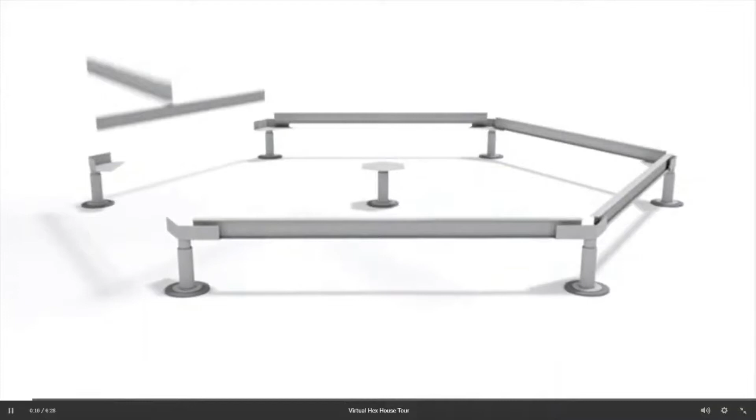One key area we've focused on, based on feedback we received, is that when there's topography - when the ground isn't even - it's difficult to lay out the shape. I understand that, but it's a perfect geometry, so it seems like it shouldn't be that difficult.

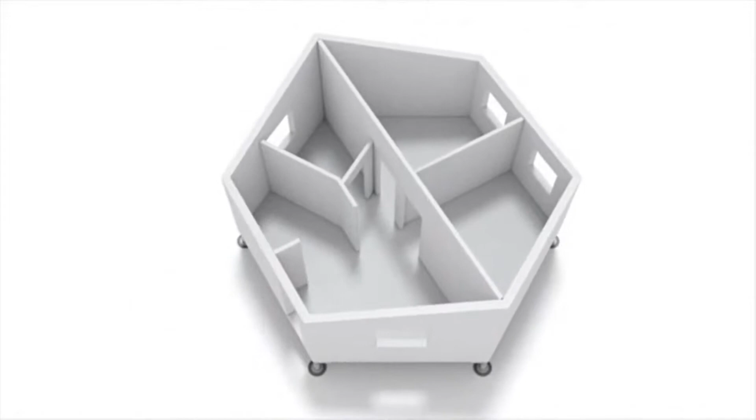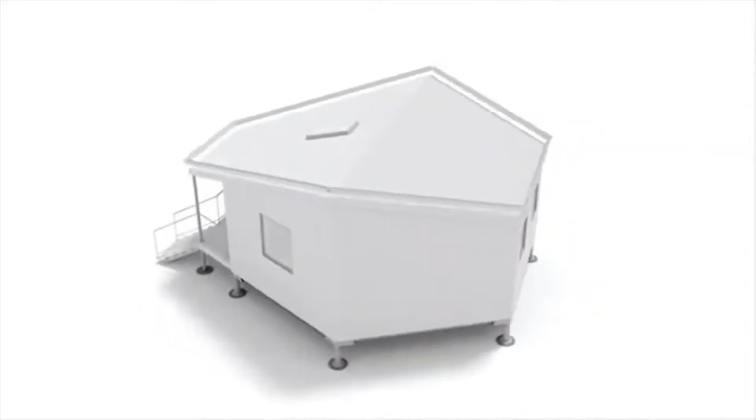We're trying to make it easier for the final user to lay out. But the foundation system can really be whatever you want - a slab on grade, helical piers, or in flood areas, piles with piers to elevate the structure. So it's very flexible in terms of how you site this.

I've been looking at hand-installed piers to see if a person could do it themselves, by hand-screwing piers in, and whether that could actually handle the weight of the building. That's a big hurdle for us to try and perfect.

But once the foundation system is in, this is a system where you're fully enveloped in a matter of days. It shows all the walls as single pieces, but those can be broken down into panels handled by a couple of people and placed where they need to go by hand. You just start assembling it like a kit, like building a much smaller model - you place the walls together, and once they're in place, you start setting the roof panels in.

Once everything is connected, the envelope is essentially done and you're weather tight. For the most part, depending on your SIPs, you might have to put on a roof system or siding for the final waterproofing layer. But it allows you to start moving trades in and out of the home, and in a disaster relief situation, you're sheltered quickly. You might not have all the amenities yet, but you can work inside the building to finish it while staying dry and warm. So that's an advantage of the design, being able to use the building as a home pretty quickly.

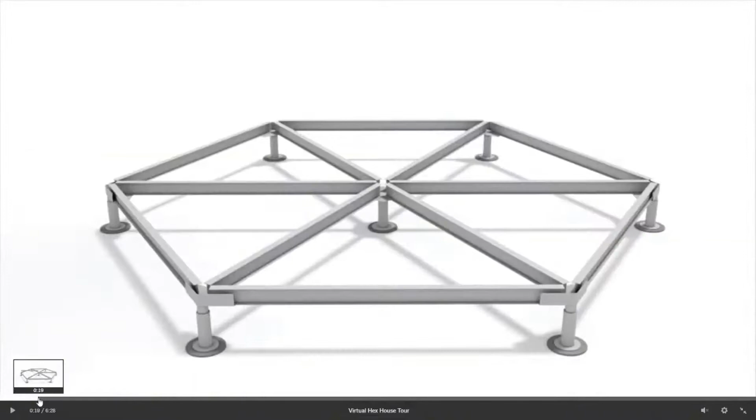That X that comes across isn't really needed. What we found is that the SIPs can span from the center beam to the perimeter, so those cross beams are not normally necessary. The prototype we built in Minneapolis doesn't include those, but has a perimeter and that center beam, which are all glulam type beams.

The one in Germany actually uses more of a traditional framing method, using joists to frame from the perimeter beams to the center beam, and then the walls sit on top of that floor. I believe the one in Amsterdam, Amro, you have to remind me.

I think it used light gauge metal, right? Was it in this configuration, or did they only have the perimeter and center beam as well? No, they had a slightly different configuration. We're developing an aluminum frame right now that we think might work to our advantage, but I've gotten different feedback from contractors saying you might have to bring in a different crew to do it, so it might not be as cost effective as we hoped.

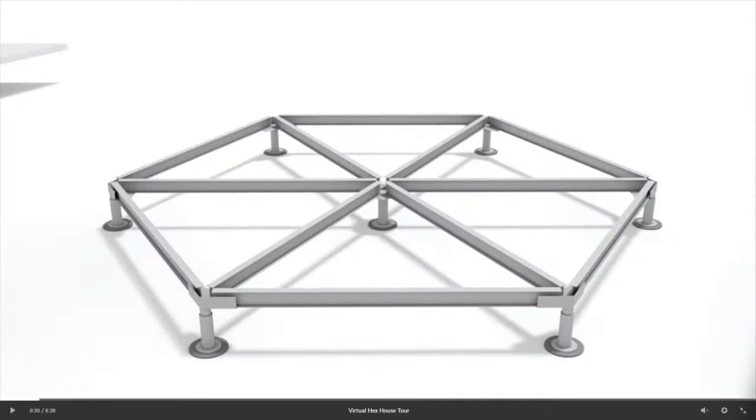But the foundation system is pretty simple. The floor can span about 12 feet. The Hex House is a hexagon inscribed in a 14-foot radius circle, so all the spans are 12 feet or less for the most part. One last point is that while the floors are designed as SIPs, it's not necessary for the floor to be a structural insulated panel if you're doing it off a slab, or if you want more traditional framing, that's completely acceptable.

So it's a 14-foot radius, and what's the total square footage then? Without doing my quick SAT math, what is the square footage? Exactly 510 square feet. Oh wow, so it's a pretty good size, much bigger than a tiny home. It's a pretty good sized footprint.

Yeah, the idea was that we sought out to design a dignified home, not something meant to be oppressive to the human, because we recognize that people live in these for a very long period of time. So we wanted to give them a decent size home. It's not even a tiny home; it's a small home.

One of the things about the hexagon is it's one of the shapes that closes in on itself, found in nature, and when put next to each other you never have any gaps. So it's a very convenient, structurally rigid shape. Also, when you have that extra break in the exterior skin of the building, you become much more rigid structurally. The floor looks like two hexagon shapes cut in half. Is that a standard size a SIPs manufacturer could make, or is the way the floor comes together challenging, or are these usually triangles that come together, or is that a standard shape?

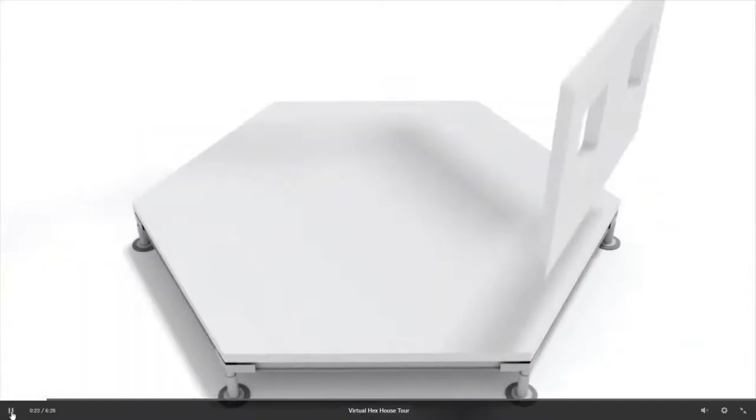It just made it more accessible, because you get the floor on, and then you start putting the walls on, and you get to the roof. So really all these pieces would be a series of structural insulated panels connected together.

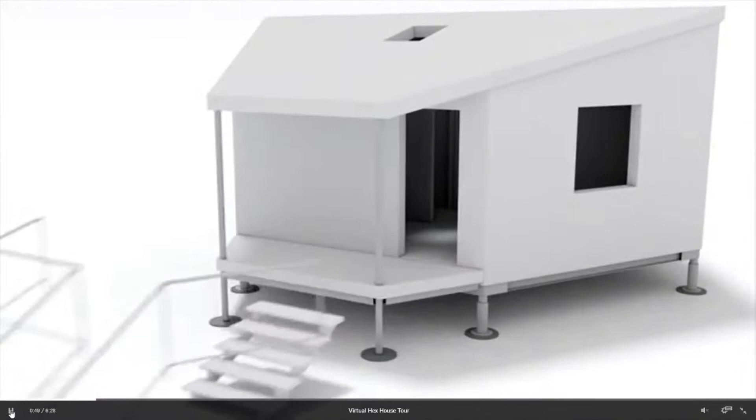And the interior walls are also SIPs, same material. They can be, or they don't necessarily have to be. But we recommend that you can do a little bit thinner SIP, because you're just trying to get the structural elements, not necessarily the insulation. It's more for sound attenuation.

But we do recommend that the plumbing wall, you just either do it with a SIP and then a framed wall in front of it, or just do it in a framed wall so you can hide the plumbing, and it makes it a much more reasonable installation for the tradesman.

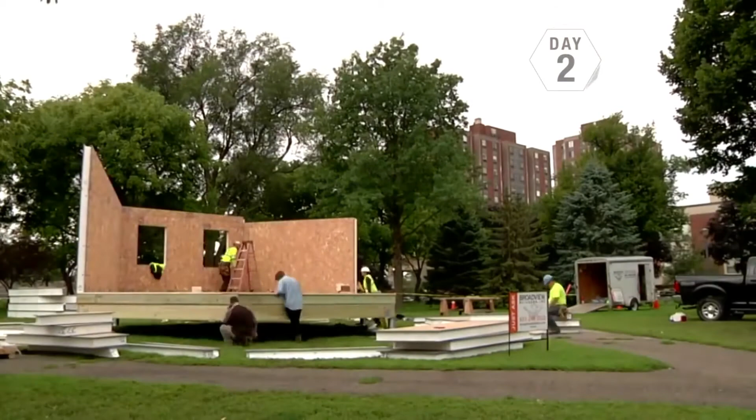The beauty of this is that at the lowest end we have a typical 8-foot, but because it's a SIP and it's spanning across, we end up at the ridge at about 12 feet. So we end up with a pretty nice vaulted ceiling, where in one of the cases we actually started slotting in extra sleeping spaces and extra storage because the ceilings were so high. So we have some lofted areas in the bedroom.

Yeah, so that's cool. So it's not a flat roof. It actually has that middle wall that creates sort of the vaulted, expansive space in each room.

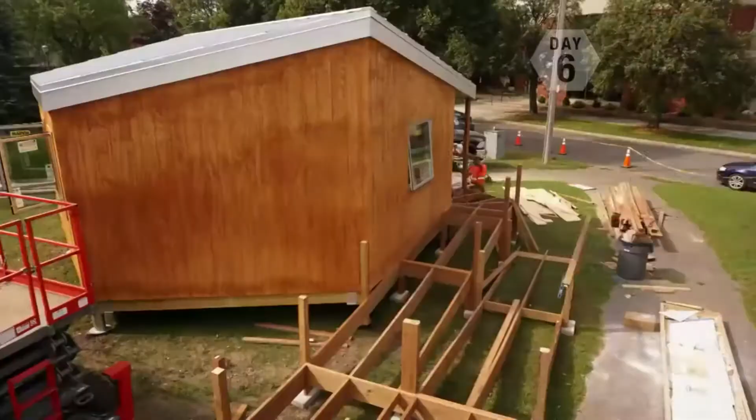That's right, and it also helps make the space feel much bigger than it really is. The slightly awkward shape of the room kind of distorts the feeling that you're actually only in a 100 square foot room, and then the vaulted ceiling, when you're in the space, makes it feel much bigger than it is.

How did you come to do the vaulted ceiling versus a flat roof? It seems like if this is made for refugee situations, simpler would be better. How'd you come to that design? Is it really not that much more complex?

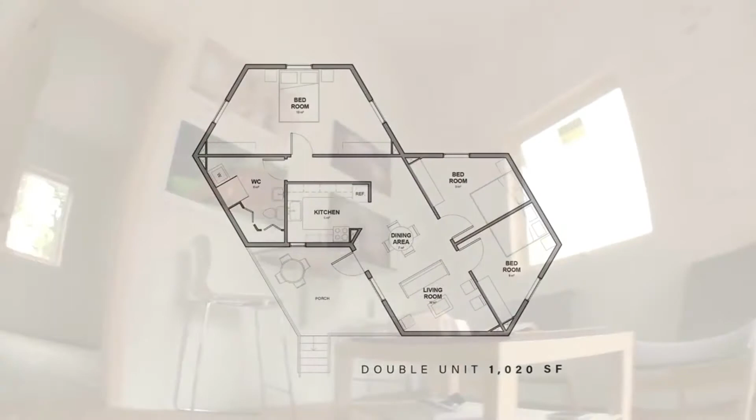Yeah, it's actually just a simplification of the design. The SIP already is structural, so it's doing the spanning, and there's no need for any extra framing. If you were to frame this out of conventional framing, you end up with a bottom chord of the truss, which would lower your ceilings at the 8-foot level. So it's just the advent of using SIPs.

Structural, and it really creates the volume that you're inhabiting. I also think that the fact that we're able to get that extra height allows for lofted areas in certain places, like Amro mentioned. It also allows us to install some of the mechanical equipment up higher. And if you don't want to see that sort of thing, you can put an 8-foot ceiling in and create a sort of crawl space that holds the equipment above.

Just another way to lend flexibility. Do any of these designs have a bathroom included in them? Does the prototype home have a bathroom in it, or where's that placed?

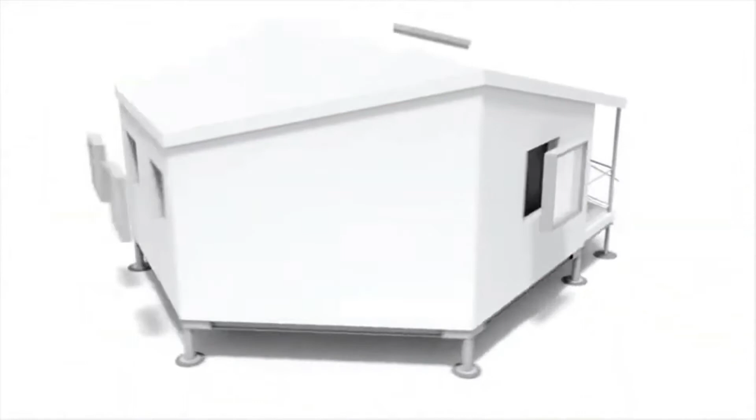If you play the video just a little bit further, when it places all the finishes in it, you see the kitchen and the bathroom share the plumbing wall. So you can see the kitchen sink and the refrigerator or whatever. Then you can see the shower, which is the one plumbing fixture that's off the plumbing wall, but there you would see a toilet and a vanity sink kind of back to back with the kitchen countertop.

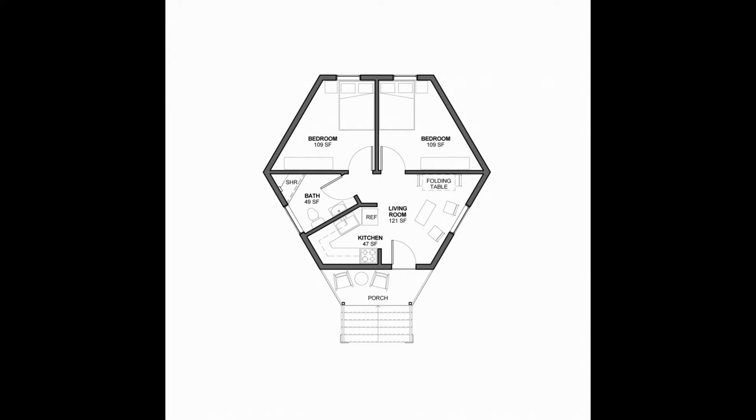So all the Hex homes have a wet wall that can be used either to make a bathroom and a kitchen, or presumably you could do 2 bathrooms and not have a kitchen. Say if it was used for a classroom or something like that, and you really wanted separate bathroom facilities for the faculty versus the students, or female versus male. So it does lend itself to some amount of flexibility.

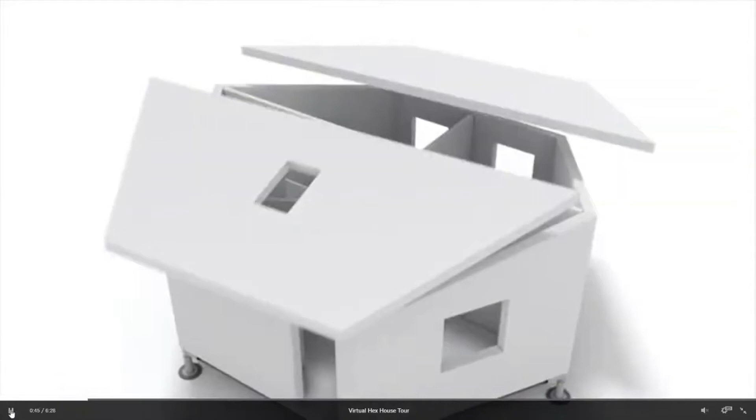Roughly how many parts does the whole hexagon break out to be? Could you basically have the 20 SIP panels all custom pre-cut beforehand and then fit into a shipping container, or how do you envision this arriving to a site?

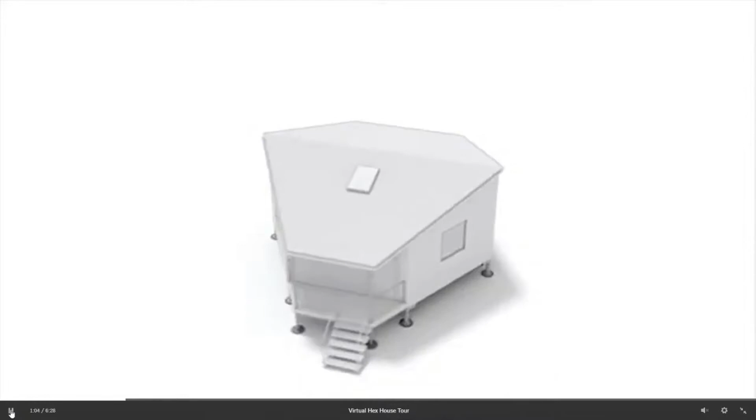So one of the ways we've been working on a project where the islands in the Bahamas are looking for solutions to build housing quickly. I say quickly, but the hurricanes hit 3 years ago, so people have been without housing for that long.

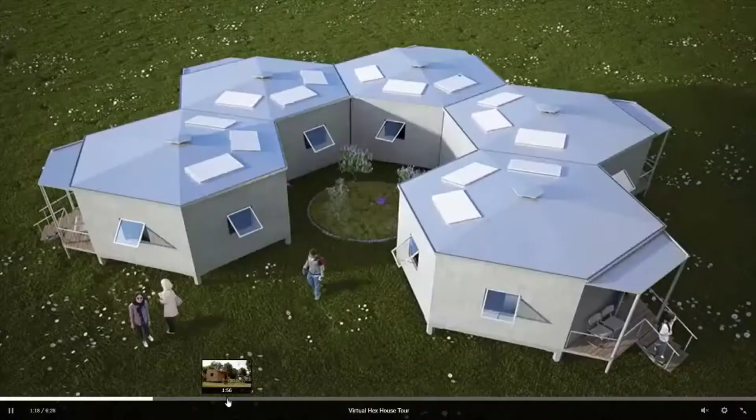In that case, what we were looking to do is pre-cut all the panels and put all the materials needed to complete one home into a shipping container. We'd ship it down to the island, and the shipping container would be taken from the dock and placed on the site.

The idea is really democratizing architecture, being able to give the end user the ability to go online, design their own unit, have it delivered to them, and be able to assemble it with very little help. So this is some of the things we're looking at for the future.

How do we lay this thing out? We struggle, for example, with some of the things with the foundation, locating it and the constructability of that. So we're looking at VR and AR, augmented reality, to mitigate some of these things.

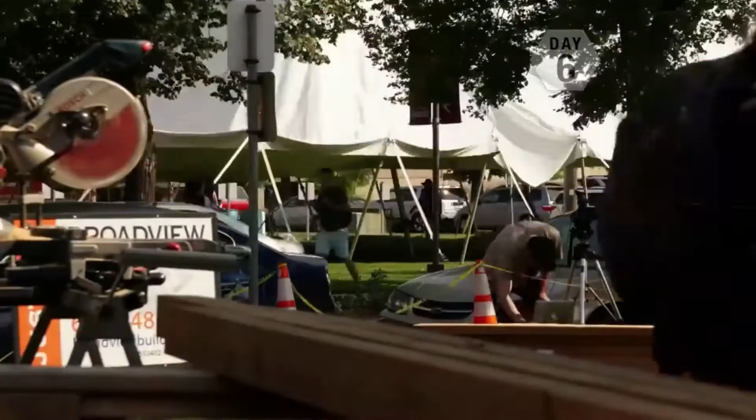We really see a future in technology, combining low tech and high tech, and being able to say: this person went online, configured their unit, and it arrived on site flat packed. Again, with some help, they were able to do 90% of it, and maybe the other 10% is done by professionals.

There's also a video that comes along with it, and maybe the AR is also showing you where the units go and where the pieces go. We're really looking into this because there's a lot of possibilities and freedoms, things that are really going to free us up to do more interesting things with these units.

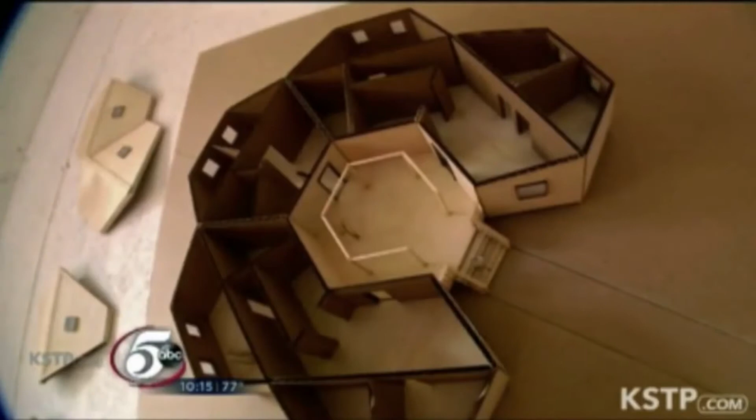Yeah, that's interesting, as far as the mass amount of destruction in places like Puerto Rico and the Caribbean, this idea really gives power back to the people to rebuild their own communities, perhaps with locally sourced materials. Are the SIPs, in a perfect world, manufactured in each country that the home is being built in? So it creates its own local economy and job force that could build the homes organically.

Yeah, we've actually been in conversations with a couple folks that have portable SIP making equipment. So theoretically, we could provide the manufacturing equipment in the order. We could send a container with raw materials and the equipment beforehand, and they can use the container it comes in to set up a SIP making facility, and then make their own wall panels.

Moving forward, they would just have to order the raw materials. The reason that's so powerful is that if the SIPs are made with polyurethane, the material comes in pressurized tanks, so it expands to many times its original volume. You're able to ship a lot of material in a pretty small volume.

So there's portable SIP factories. That's interesting. How portable are they, do they fit inside a shipping container? It's like a mold press. Imagine a big hydraulic clamshell: you open it up, put your skins in, close it, then inject it with polyurethane, and then cure it.

Traditional SIP construction uses OSB with an adhesive, then expanded polystyrene as the insulation, EPS, which is basically styrofoam. The newer method, using polyurethane, allows you to create the SIP with a press, and the polyurethane actually acts as the adhesive holding the panel together. So it's really taking it to a different level.

How'd you guys choose these materials? Why SIPs, and why this particular type of sandwich material combination?

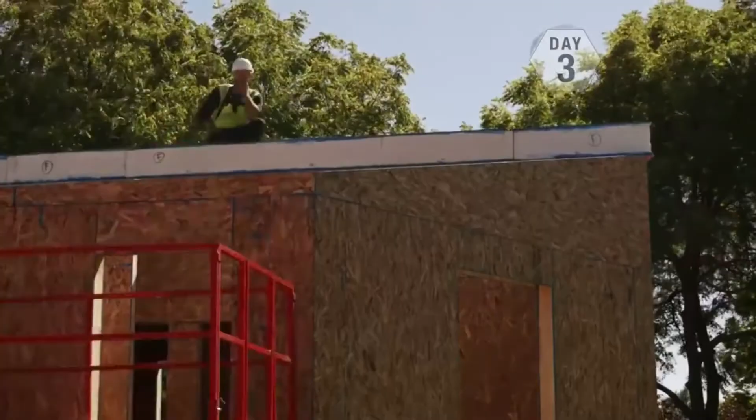The main advantage of the SIP is that you're achieving both structure and very high R values with one component. So for us, it was so compelling to remove as many steps as possible. If the skins are available, you have your final exterior layer, your structure, your insulated value, and your interior finish—all in one process.

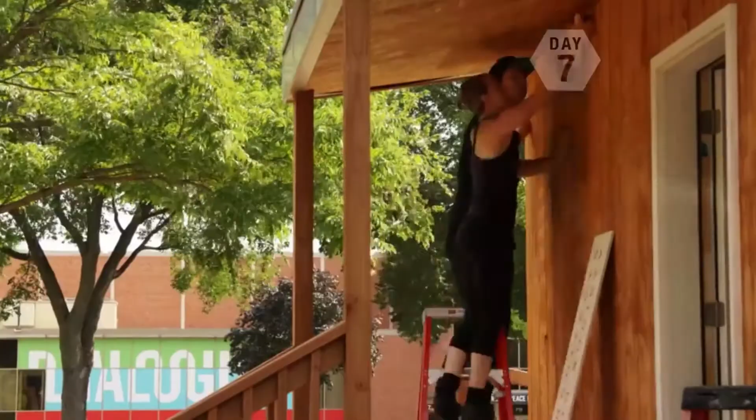It wasn't put the frame up, put the sheathing on, put the insulation in, put the building paper on, put the siding on, now put the drywall—what I mean? It eliminates probably 15 steps. And in cases of disaster relief especially, the faster you can create a safe and weather-tight enclosure for someone to shelter in, the better.

So in this example we're looking at right here, the exterior—so this is a sandwich panel, but does it have a separate exterior that's added on top, or is that part of the SIP?

It has both the interior wall and the exterior siding. In this particular case, the SIP manufacturer that was closest and would work with us makes SIPs with the historic type of materials, OSB and EPS. So in this case, yes, you actually had to put siding on it. T111 siding was put on the face of the SIP on the exterior, and the interior has gypsum board—the final version just has gypsum board, but the initial version we just painted the interior OSB.

So to answer your question, I think one of the challenges we're facing is that SIP manufacturers tend to provide primarily OSB and EPS SIPs for two reasons. One, the cost is less, although OSB prices just doubled in the last month, so maybe that's not true anymore, but historically that's been a big driver. The other reason is they've already tested and gotten all the testing done for this particular assembly because it's been around the longest.

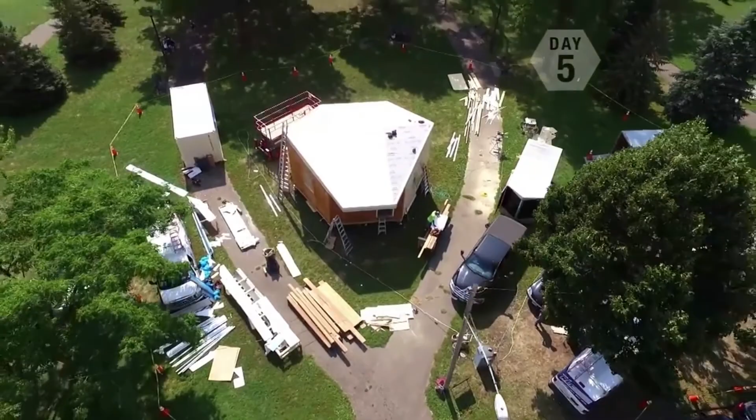So instead of taking on another round of testing, they've continued to sell this particular version. It's becoming more common, but it's still not there where you can get a SIP manufacturer to provide skins made out of magnesium oxide or fiber cement board. In some cases there's some that have like a corrugated metal. It's coming, it's just that for every alternative you have to go through a rigorous testing process that takes usually over a year and costs almost $100,000. So these are the barriers in the way of SIP construction, and I think once we can overcome those, we'll be in a much better place to help people that need housing.

So is the SIP with both the interior and the exterior in the way that you want it currently tested and certified and readily available in the US? Yes, but not nearly to the regional extent that we would be interested in partnering with. They are available in certain markets, which is great, but we want to standardize throughout where we're providing these, throughout the US and throughout the world.

Ideally we'd want to come up with a solution to overcome that—either the SIP manufacturers start to become more willing to provide those alternate skins and alternate processes, or we figure out a way to provide the SIP-making equipment as part of the kit, and we certify it, or the manufacturer of the equipment certifies it, and that certification follows the equipment. That would be another way to overcome it.

As far as durability and resilience factors with this design—I'm assuming these panels are up to a certain standard of fire resistance, mold, and wind strength. How is it designed, and what conditions is it great for, and what conditions maybe isn't it designed for? Is it built up to seismic code for California, wind code for Florida?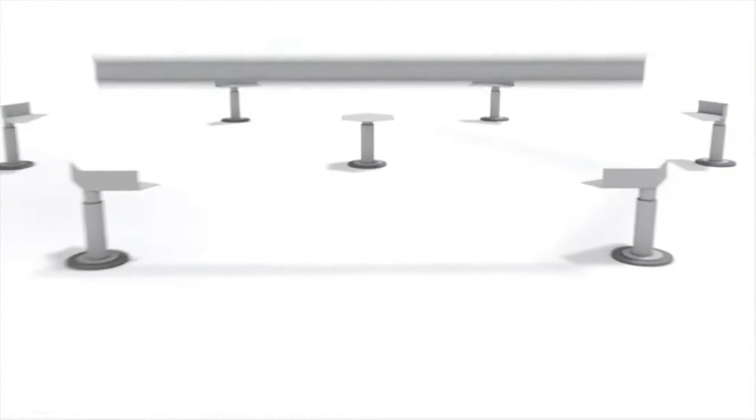So it depends. The unit you see here is what we call in the construction world a closed system, so it's been tested for all these things: seismic, wind, snow loads, and all kinds of lateral and axial loads. But depending on the region you're working in, there may be certain ones tested for seismic. If you're working in Florida, you'll get ones tested for hurricane wind loads, but you won't find those in the Midwest. On the West Coast, you'll find manufacturers who tested theirs for seismic, but obviously that won't be found in the Midwest.

And because this home is being assembled on site, is this subject to a state's off-site manufacturing code, or is this being inspected during the construction process by the local municipality? Where does this fit in the off-site kind of modular construction process?

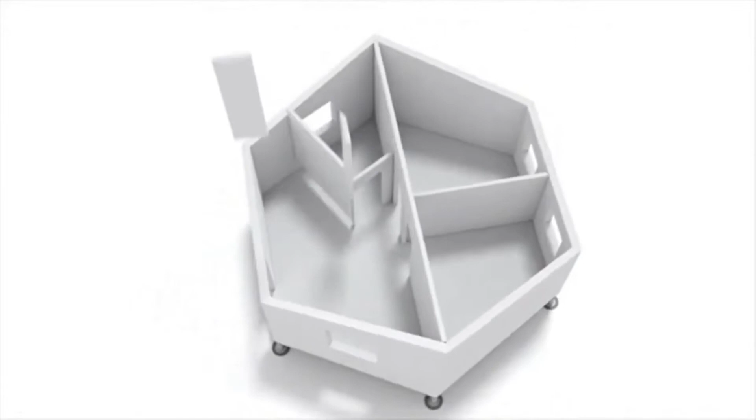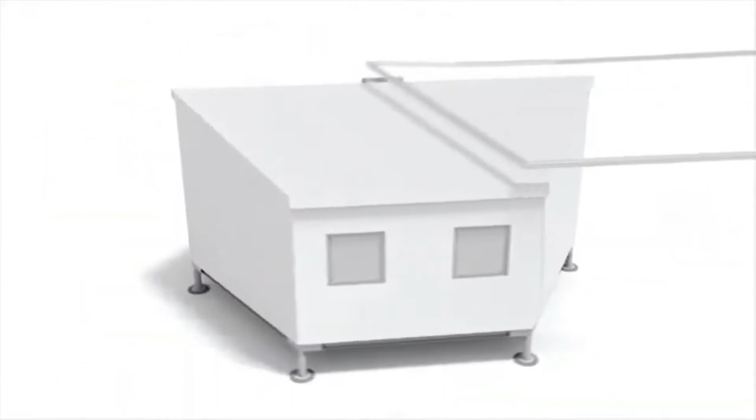I think it falls into the more traditional construction realm, where there are inspections called for and performed on site. When you think about it, Amro's right, it's a closed system, but since the building is assembled on site, it really lends itself to a more traditional way of inspections.

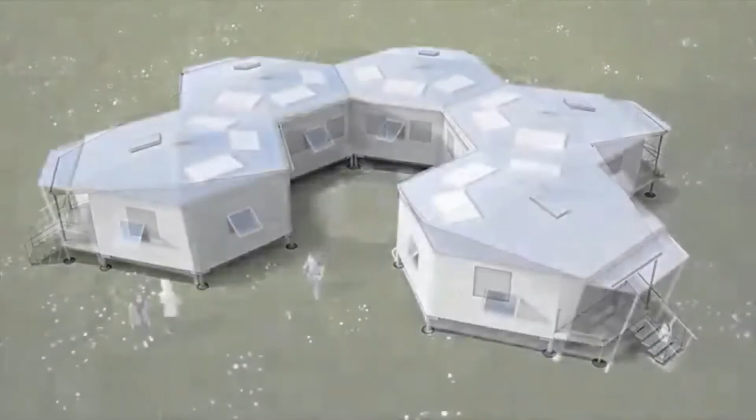Okay, and then as far as customization and flexibility, customization of the siding really depends on the SIPs manufacturer in the region and what's readily available. But it sounds like you can also add on whatever siding you want on top of the SIP. Is that right?

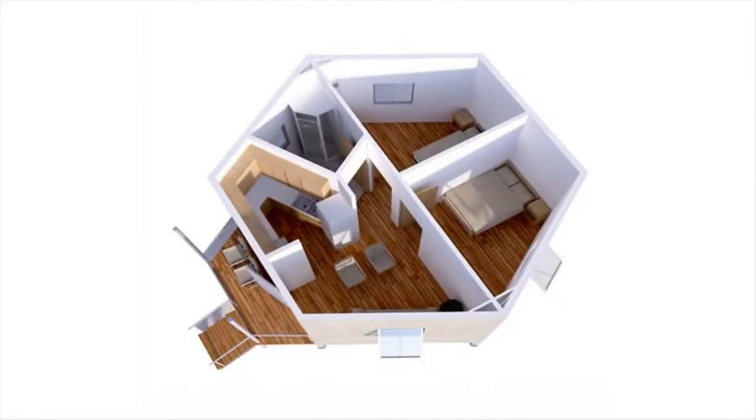Absolutely, that's right. Our hope would be that we could provide a SIP that has a final exterior layer. However, that's mainly to get people into a home that suits them so they don't have to worry about it being inadequate. But we also realize people have different tastes, so you might have a cement board exterior SIP, but in a couple years want to do cedar siding or something—that's completely acceptable.

So you could really fit this Hex House to any kind of architectural or neighborhood character you may need, in order to comply with historical code or some design aesthetic of the area.

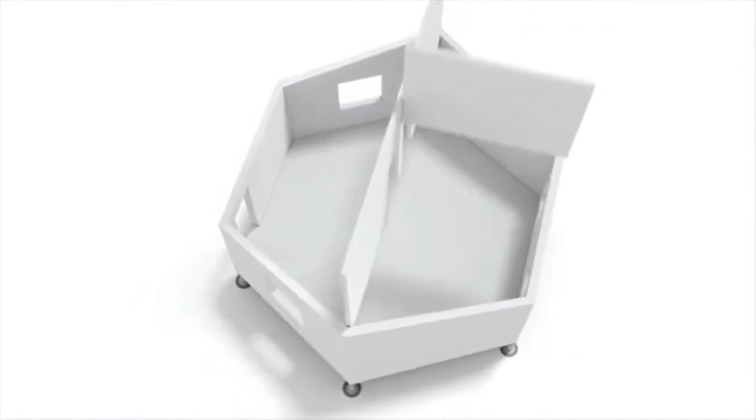We haven't really looked at masonry solutions, to be honest I wouldn't probably recommend it. Maybe a thin brick installed over the wall panels is fine, but in terms of installing a veneer or something of brick, I don't think that would be a solution we'd recommend, just because it negates the whole idea of the home being light and able to be disassembled if needed. So that's the one area we'd have challenges with.

You couldn't make this look like a stone cabin? Maybe we can, but I have a feeling it would cost more than you want to pay, and I'm not sure it would ultimately pay off.

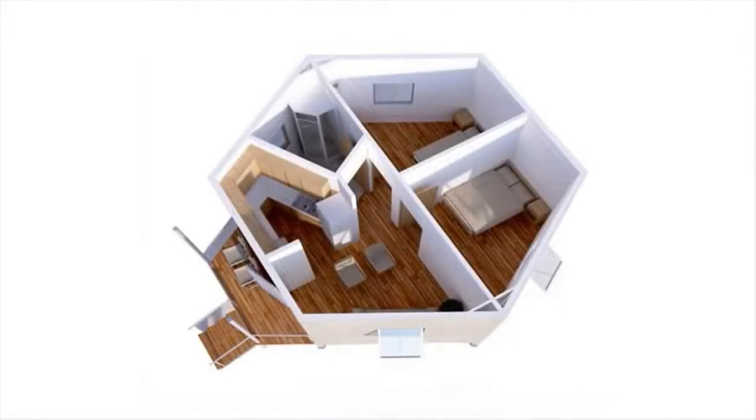It seems like it really depends on the SIPs that you use, but are there any other green design aspects worth noting here? Well, one of the major things we've been exploring is how do you incrementally make this an off-grid possibility?

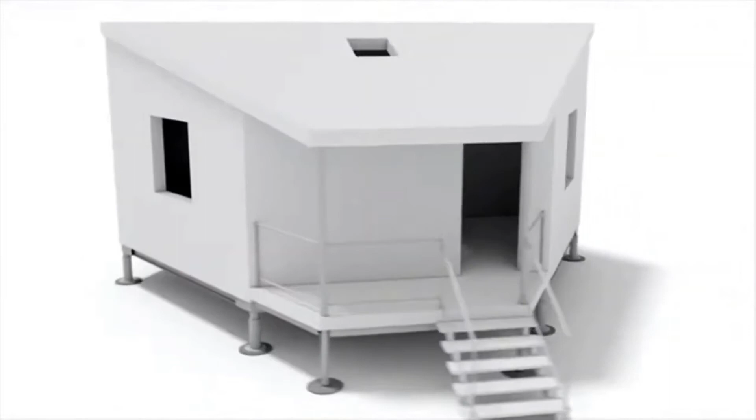The roof itself is over 700 square feet, bigger than the floor plan obviously. So it would take about 15 solar panels to take this 100% off grid, depending on your exposure. So I think there's some realistic off-the-grid electrical solutions.

You could also have off-site wind, or a solar farm that many of these structures share. When it comes to gray water management, I think that's a solution we could employ—a composting toilet, and gray water reclamation from the sinks used for flushing toilets. Potable water is a bigger challenge, since most municipalities won't allow reclaimed water to be used as potable, even with an approved filtration system.

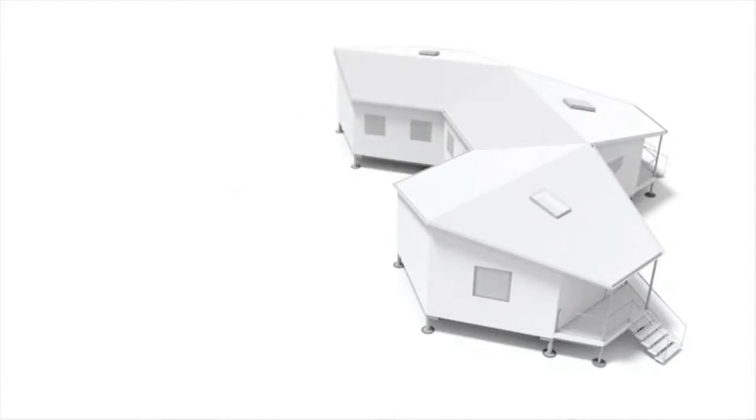So that's a bigger challenge. But if you can make it 100% electric, because the loads are so low since it's a closed system, I think that's probably your best off-the-grid solution. As for water, that's probably one that would have to be—maybe you could have a sort of water buffalo as a separate facility, and have all the units feed from it, with that water replaced by other potable water. But I think that's the bigger off-the-grid challenge we've seen.

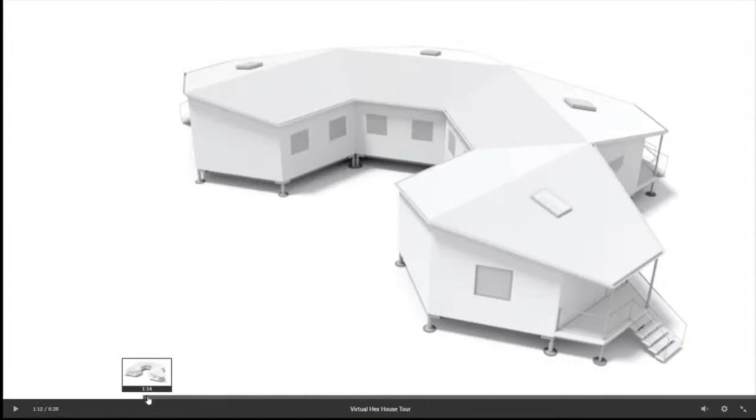And I want to go back to this animation of these homes being expanded on. As far as the connectability of them and continuing to expand over time, I think that's an interesting aspect.

So let's say you had one in an encampment or a village and started adding on and expanding the rooms—how easy is that? I guess you pop off one panel of one side of the hexagon and start building from there? How do you envision expanding this over time, and what kind of flexibility is there?

I think you'd actually build the expansion and enclose it before you cut into the existing unit. If you know you're planning to expand, the SIPs can be designed so you can remove a large portion of the common wall to create the pass-through. But I wouldn't do it until after the new expansion has been finished, so you're not dealing with construction debris or construction personnel, and people in your family won't be crossing paths with the builders. So it's easy to expand as long as you follow the sequence that I think is most desirable.

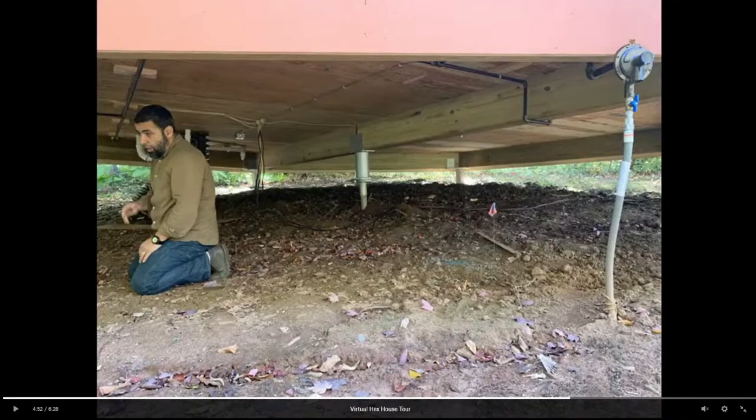This picture was taken as kind of a lesson learned one, because you can see how the pedestal is actually off center of the helical pier. Sorry about that picture, Amro, you look like you're about to sneeze.

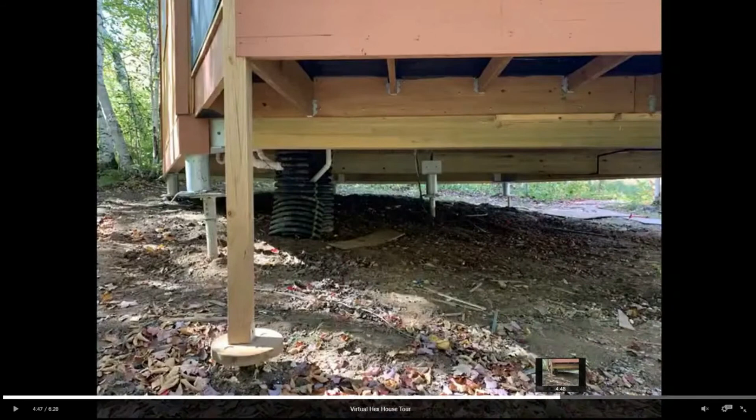But you're looking right now, it's not enclosed yet, but this is where I think all the utilities are coming up, so they're all in a very centralized area. Yeah, so all the plumbing, I believe he has gas, does he have gas I think coming through there? Natural gas, all coming through kind of that same area. And what he had planned is to enclose that and then provide some sort of freeze relief just so it's not in danger of the weather when it drops low.

But if you see right there, if you look at the helical pier to the left of that wood column, you can see the pedestal is off the pier, the center of the pier. So that's one of the things we're trying to overcome, because there's no reason why you can't hit these exactly. At this point in time, we have the technology to make sure these pedestals line up exactly with your helical pier or whatever your foundation system is. So I think that's one of the challenges for us, to make sure we include whatever is necessary to make sure that gets laid out in a way that no one has to worry about missing the mark.

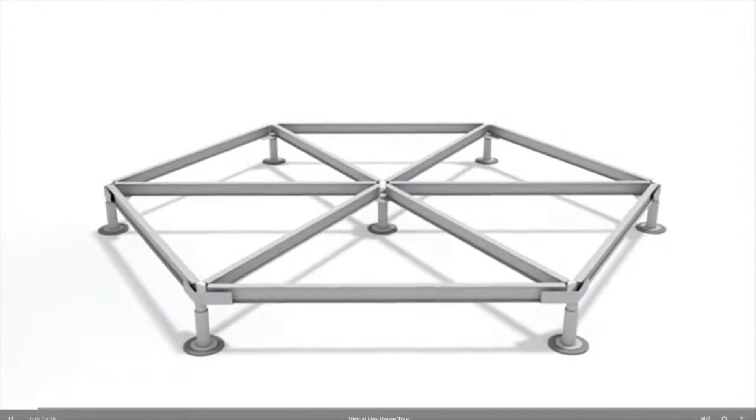So we've seen a lot of unique and innovative features of this housing solution. What would you say the most innovative is?

Well, that's a good question.

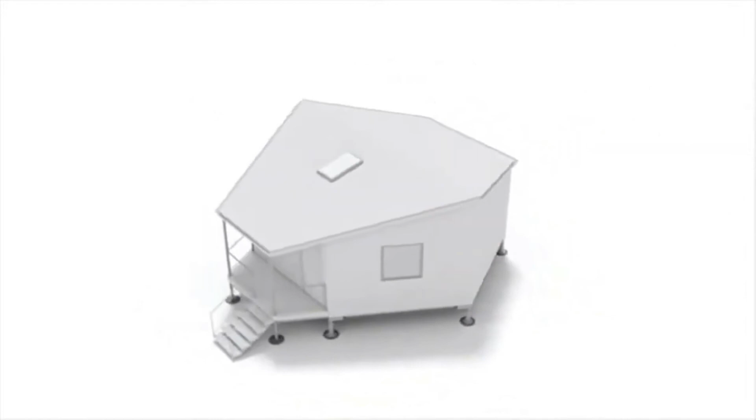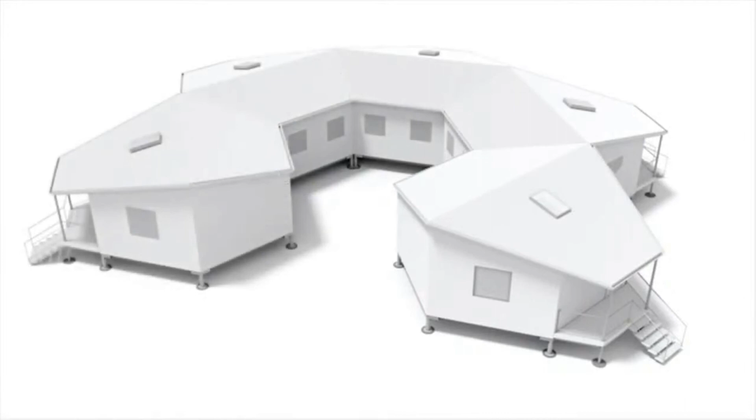I think the exciting thing about this project for me was always the urban design implications and how this design can be used in a scalable way to create communities with public, semi-private, semi-public space. I think the geometry lends itself to that and provides the occupant with a new way to experience community, because you're not lined up like dominoes looking one wall to another. Everything is kind of off-kilter, which allows you to get vistas and have a unique structure, even though all the volumes are similar.

I'd add that the unique feature is the system itself—being able to develop a system that is amenable to the site, amenable to the country you're in, and that allows the average person to have a home, a dignified home, in a very short amount of time.

Is there anything you'd say is the most misunderstood aspect, of either the design or the construction process, that you've had to over-explain to folks?

Yeah, one of the biggest hurdles to explain to clients, and even for us to solve, is the cost. Construction, because we bid off a project that's meant to be dignified, durable, meant to be a regular home, but fastly deployable. We're always faced with clients who have a little sticker shock at how much it costs, but they don't recognize the longevity and expandability of it. Even compared to average construction costs, it's still much less.